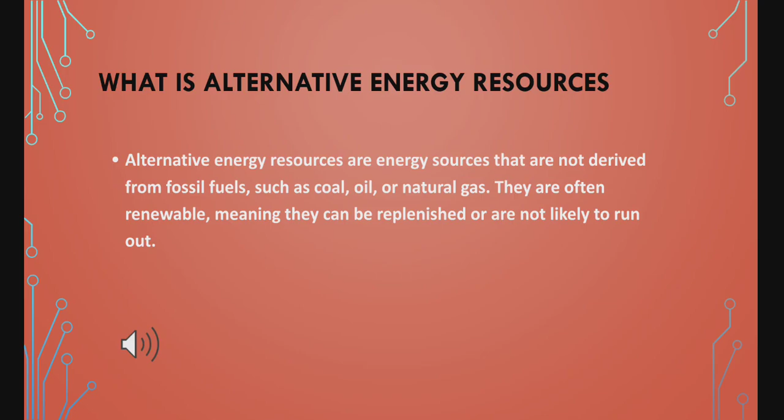What is alternative energy resources? Alternative energy resources are energy sources that are not derived from fossil fuels such as coal, oil, or natural gas. They are often renewable, meaning they can replenish or are not likely to run out.

Energy is the capacity to do work. All forms of life, particularly humans, need energy to perform life processes. Likewise, energy is required to enable machines to function.

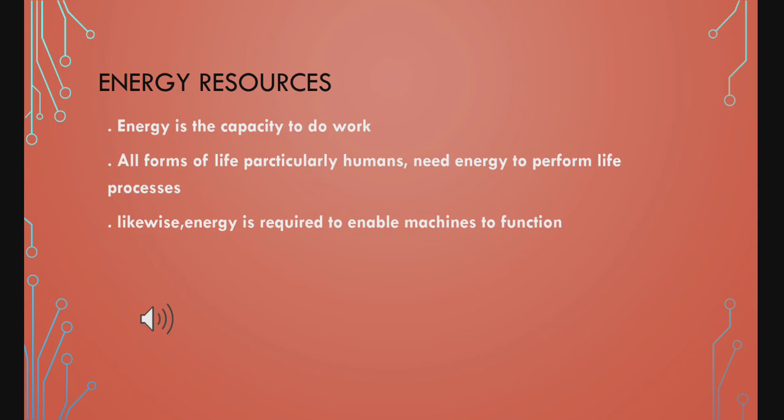An energy resource is something that can produce heat, power life, move objects, or produce electricity. Most of the energy being used today comes from fossil fuel. Fossil fuel is biomass energy buried within the earth where it is stored until humans extract and burn it to release the energy. Among these sources are petroleum, oil and natural gas, oil shale, tar sands, and gas. The energy mix is roughly 39% petroleum, 24% natural gas, 23% coal, 8% nuclear, and 6% others.

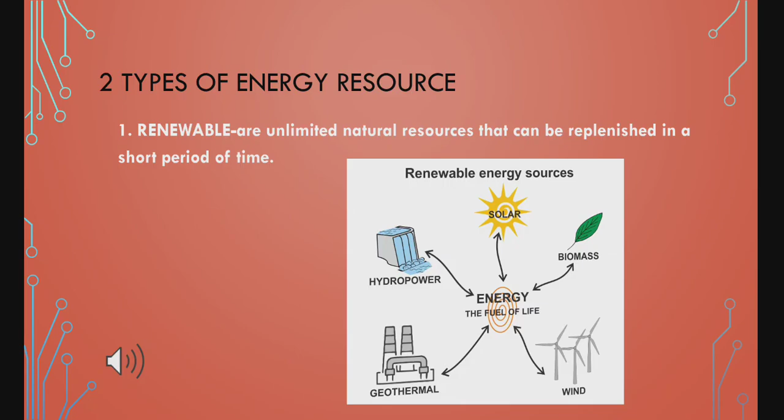Two types of energy resource. Number 1, renewable, are unlimited natural resources that can be replenished in a short period of time. Number 2, non-renewable, are limited natural resources that cannot be remade or regrown in a short amount of time at a scale comparable to its consumption.

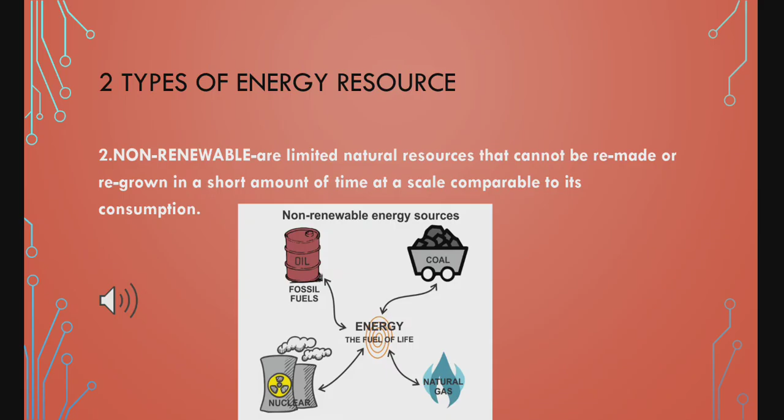The issue is this: since fossil fuels are non-renewable sources of energy, how much longer can society rely on this source? Further, what are the options for the future?

Alternative Energy Resources (AER). Alternative or renewable energy resources are important and necessary to respond to society's energy needs and battle against climate change. Alternative energy refers to clean, natural, and renewable energy sources. These may be solar, wind, geothermal, waves, tide, waste, biomass, hydrogen, and so on.

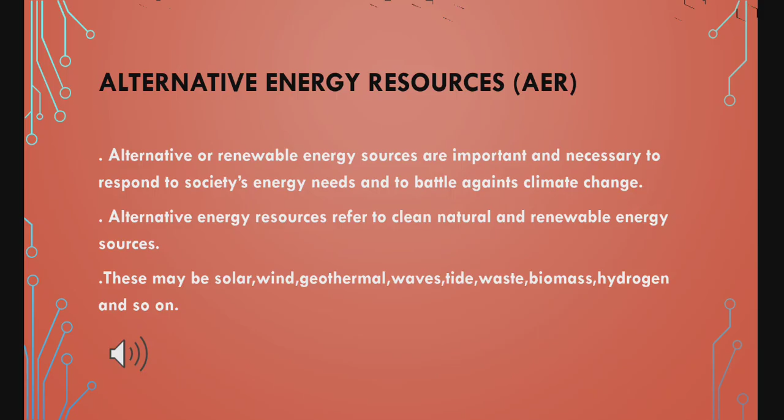Solar energy. Solar energy is derived from the sun's light, forming electromagnetic waves which are converted to electrical or mechanical energy. Solar power is a reliable and safe alternative energy source today because it produces free heat, free electricity without producing and releasing harmful carbon dioxide (CO2) emissions.

The solar farm in Calatagan, Batangas, the largest solar farm in Luzon, generates heat from the sun according to the developer of Solar Philippines. The solar farm consisted of over 200,000 panels on a 160-hectare property and could supply enough power for the entire western Batangas.

The largest solar energy in the Philippines and the world. The Helios Solar Power Plant, the largest solar energy facility in the Philippines, also known as Helios Solar Park, is a significant solar power facility in the Philippines, located in Cadiz City, Negros Occidental. It boasts a capacity of approximately 150 megawatts, making it one of the largest solar power plants in the country.

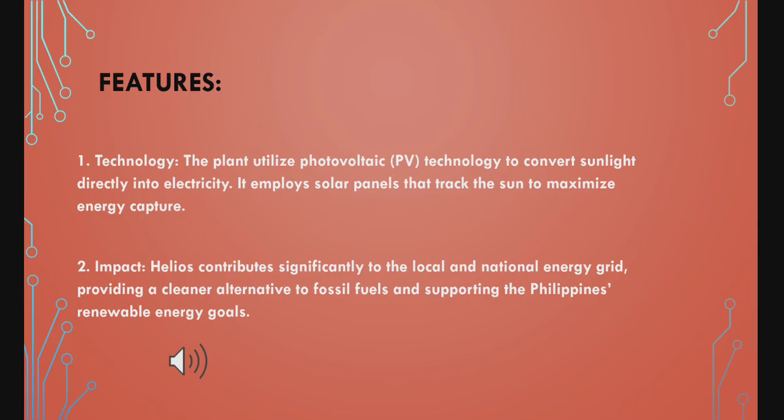Number 2, Impact. Helios contributes significantly to the local and national energy grid, providing a cleaner alternative to fossil fuels and supporting the Philippines' renewable energy goals. Number 3, Sustainability. The project helped reduce greenhouse gas emissions and promote sustainable energy practices, contributing to the fight against climate change. Number 4, Local benefits. The facility not only generates power but also creates local jobs during construction and operation, fostering economic development in the area.

The largest solar energy facility in Philippines and the world. The largest solar energy facility in the world is Bhadla Solar Park, located in the Bhadla region of Rajasthan, India.

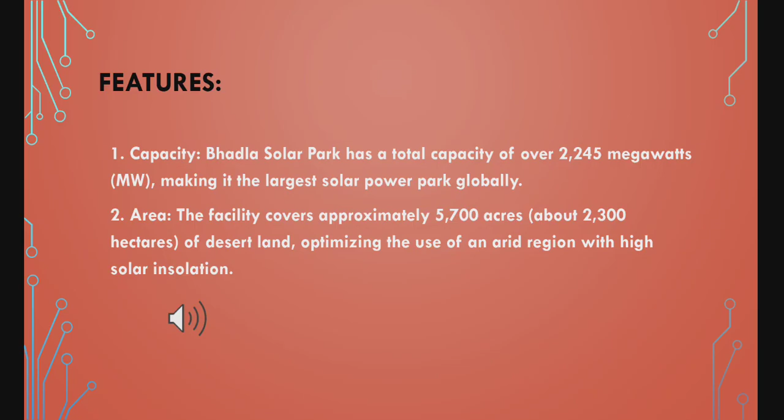Features. Capacity: Bhadla Solar Park has a total capacity of over 2,245 megawatts, making it the largest solar power park globally. Number 2, Area: the facility covers approximately 5,700 acres, about 2,300 hectares of desert land, optimizing the use of an arid region with high solar insolation.

Number 3, Development. The park consists of several solar power plants developed by various companies and is part of India's larger push towards renewable energy, aligning with the country's goals to achieve 100 gigawatts of solar power by 2022.

Number 4, Technology. The facility primarily uses photovoltaic panels that convert sunlight into electricity. The design allows for efficient energy generation with solar trackers that adjust the panel position to follow the sun.

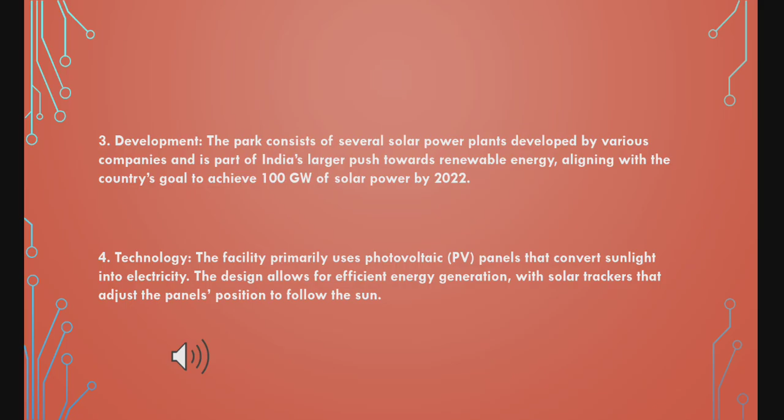Number 5, Environmental impact. Bhadla Solar Park significantly reduced carbon emissions and helped India decrease its reliance on fossil fuel, contributing to global efforts to combat climate change. Number 6, Economic benefits. The project has created numerous jobs and supports local economies while also ensuring a stable energy supply for the region.

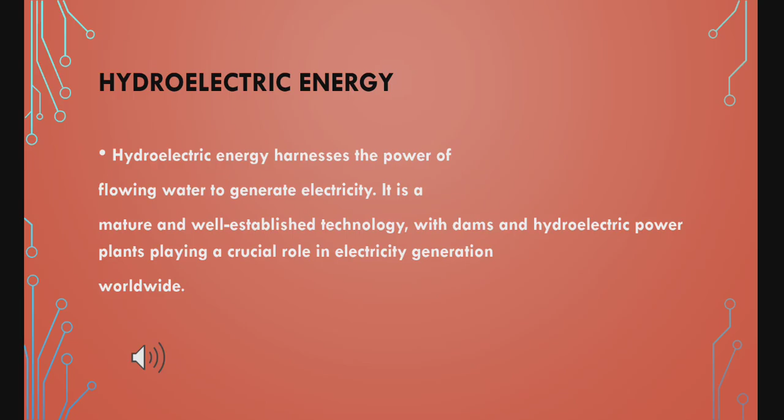Hydroelectric energy. Hydroelectric energy harnesses the power of flowing water to generate electricity. It is a mature and well-established technology, with dams and hydroelectric power plants playing a crucial role in electricity generation worldwide.

How it works. Hydroelectric power is generated by using the moving water to turn a turbine, which then spins a generator to produce electricity. At the plant level, water flows through a pipe also known as a penstock and then spins the blades in a turbine, which in turn spins a generator that ultimately produces electricity.

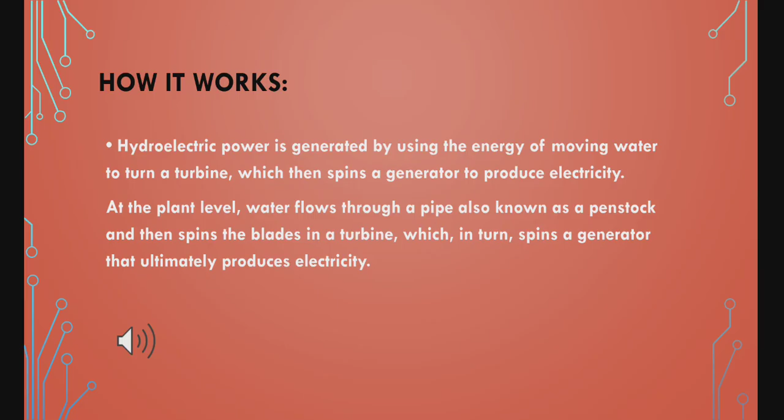Example: Magat Dam, located in Isabela, has a capacity of about 360 megawatts and provides irrigation as well as hydroelectric power. 2. Binga Dam, situated on the Agno River in Benguet, has a capacity of 140 megawatts and is part of a larger hydropower system.

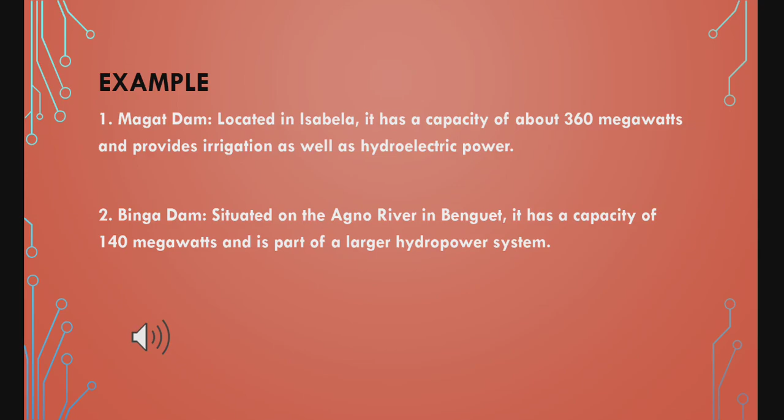3. Ambuklao Dam, also on the Agno River, this facility has a capacity of 75 megawatts and plays a key role in flood control and irrigation. 4. Kalayaan Hydroelectric Power Plant, part of the San Roque Multipurpose Project, generates approximately 400 megawatts.

5. Maria Cristina Hydroelectric Plant, located in Iligan City, has a capacity of 200 megawatts and is known for its role in the Mindanao grid.

Geothermal energy is energy that comes from the heat inside of the earth. Underground heat is produced by the presence of the molten rock called magma.

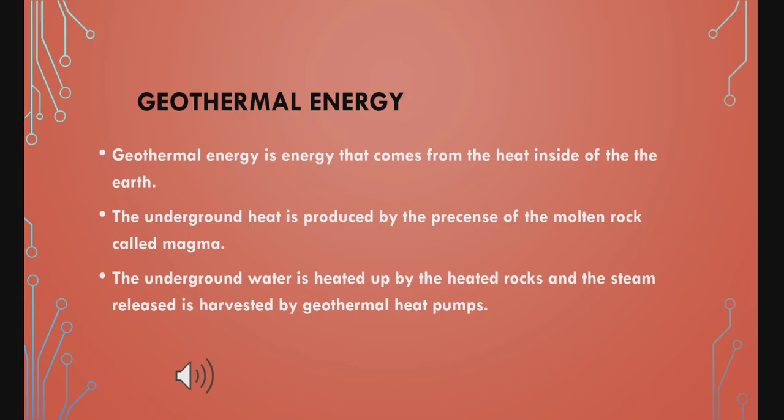The underground water is heated up by the heated rocks and the steam released is harvested by geothermal heat pumps.

Geothermal energy is limited to areas of known thermal activity, mainly recently active volcanic areas.

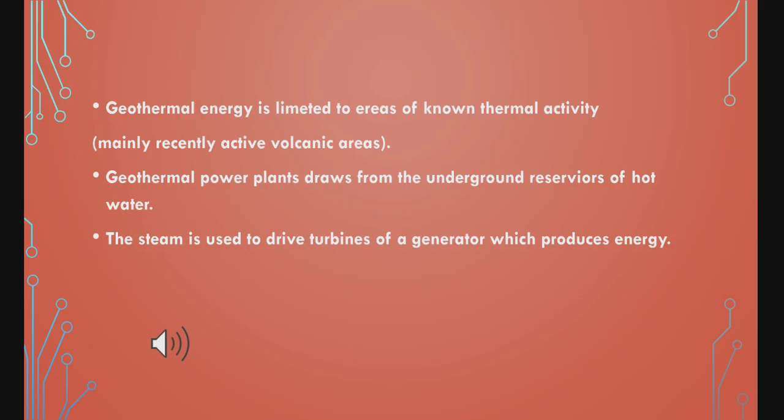Geothermal power plants draw from underground reservoirs of heated water. The steam is used to drive turbines of a generator which produces energy.

Makban Geothermal Power Plant located in Laguna. This plant has a capacity of around 400 MW and supplies electricity to the Luzon Grid.

Tiwi Power Plant generates about 300 MW and is one of the earliest geothermal power plants in the country.

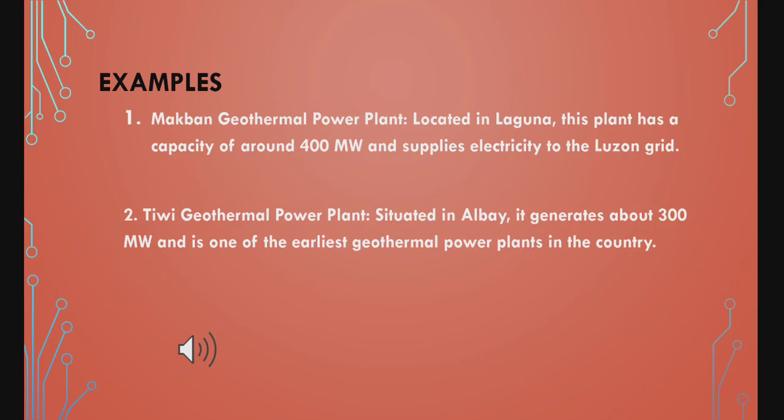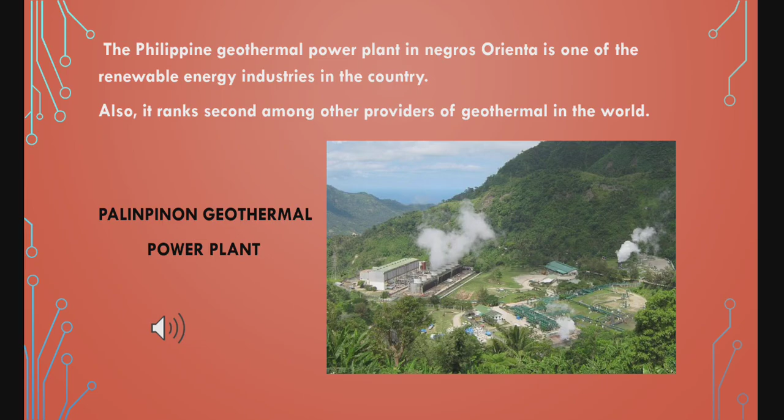Geothermal power plant in Negros Oriental is one of the renewable energy industries in the country. It also ranks second among the providers of geothermal energy in the world.

Wind energy. Wind energy is clean energy derived from wind. It is distributed offshore and onshore by large wind turbines.

Wind turbines use the momentum of moving air to quietly turn large blades that are attached to the shaft of an efficient generator. Wind power is converted to mechanical or electrical energy.

Wind power is limited to areas with high, consistent winds, and so is limited to very specific areas.

How it works: wind turbines. Wind turbines are the primary technology used to harness wind energy. When the wind blows, it turns the blades of the turbine.

Rotation: the rotation of the blades spins a rotor connected to a generator inside the turbine. As the rotor spins, it drives the generator to convert mechanical energy into electrical energy.

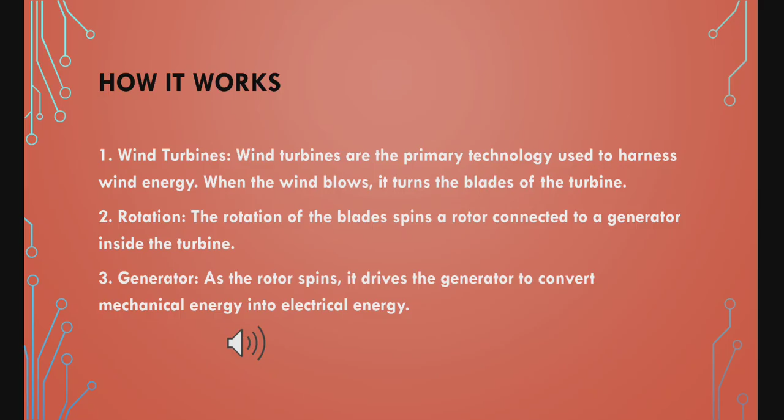Electricity transmission: the generated electricity is then transmitted through power lines to homes and businesses. Grid integration: wind energy can be integrated into the electrical grid, complementing other energy sources.

Example number 1: Burgos Wind Farm, Ilocos Norte. This is the largest wind farm in the country with a capacity of 150 MW. It consists of 50 turbines and contributes significantly to the local grid.

Number 2: Bangui Wind Farm, Ilocos Norte, one of the first wind farms in the Philippines. It features 20 turbines with a total capacity of 33 MW, and is also known for its scenic views.

Number 3: Caparispisan Wind Farm, Pagudpud, Ilocos Norte. This project has a capacity of 54 MW and is part of efforts to harness wind energy in the region.

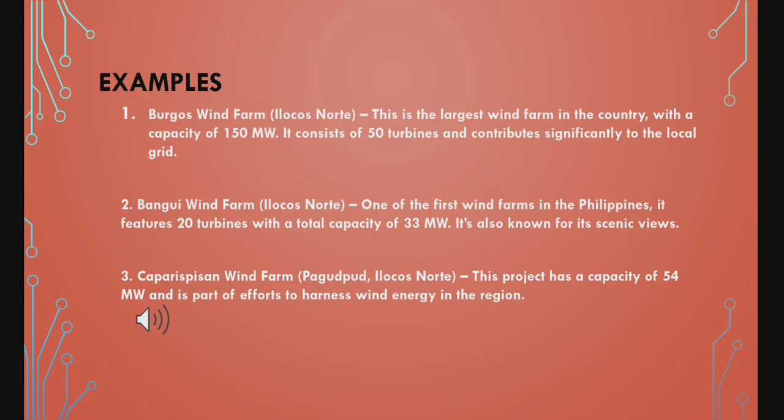Number 4: Nabas Wind Farm, Aklan. This farm has an installed capacity of 63 MW and plays a crucial role in supplying renewable energy to the Visayas region. Number 5: Guimaras Wind Farm, Guimaras.

This is a smaller project but contributes to the local renewable energy mix, enhancing energy security in the area.

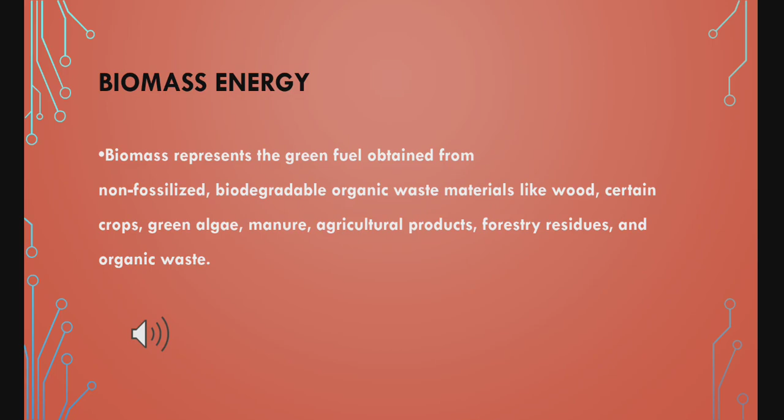Biomass energy. Biomass represents the green fuel obtained from non-fossilized, biodegradable, organic waste material like wood, certain crops, green algae, manure, agricultural products, forestry residues, and organic waste.

These materials are burned to create steam from a centralized water source, which then turns a turbine so that energy can be created. Biomass energy can be converted into a stable form of heat and electricity.

Biomass is considered a cheaper renewable energy source because trees regrow and waste will always exist as long as there is life on Earth.

A power station that uses biomass to generate clean electricity will consume at least 75 tons of biomass every hour to generate above 50 megawatts of energy.

Biomass project in Cadiz City is a power plant with a generation capacity of 18 megawatts, supplying base load power to the local grid. The biomass facility uses agricultural wastes such as sugarcane trash, coconut husk and shell, wood, grasses,

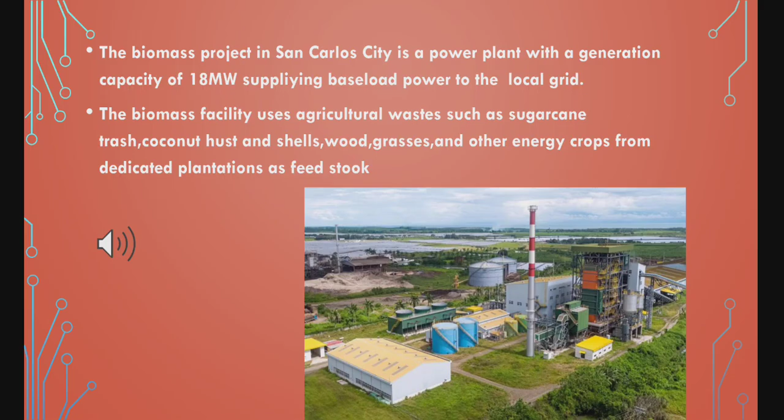and other energy crops from dedicated plantations as feedstock. Rice husk, a byproduct of rice milling, is often used for generating electricity and heat.

Sugarcane bagasse, the fibrous residue left after extracting juice from sugarcane, is commonly used in sugar mills for power generation.

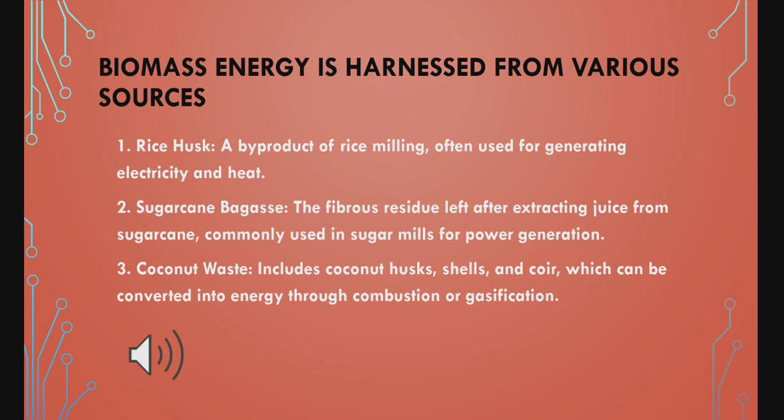Coconut waste includes coconut husk, shell, and coir, which can be converted into energy through combustion or gasification.

Wood and forest residues, sourced from logging activities and tree plantations, are used for biomass power plants. Agricultural residues include material from corn, bananas, and other crops, which can be used for bioenergy production.

Animal manure, waste from livestock, can be anaerobically digested to produce biogas for heating and electricity.

Biogas from landfill: organic waste decomposition in landfills produces methane, which can be captured for energy use.

Ocean energy. Ocean energy is derived from tidal current or wave energy, which is converted into mechanical energy or electrical energy. About 71.11% of the Earth is covered by water bodies, especially oceans.

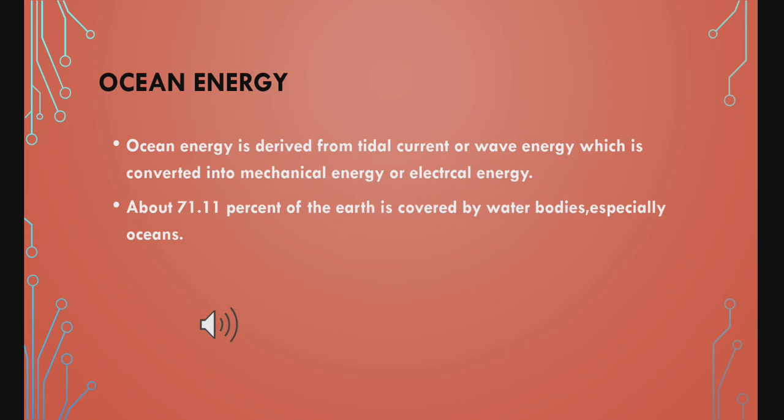How it works: tidal energy. This uses the rise and fall of the tides caused by the gravitational pull of the moon and sun. Tidal turbines or barrages capture this kinetic energy.

Number 2: wave energy. Waves created by wind energy on the surface of the ocean can be captured using various devices such as point absorbers and oscillating water columns, to convert the motion into electricity.

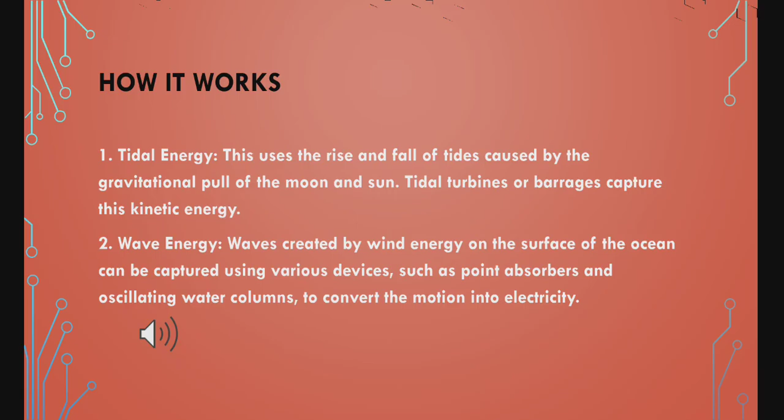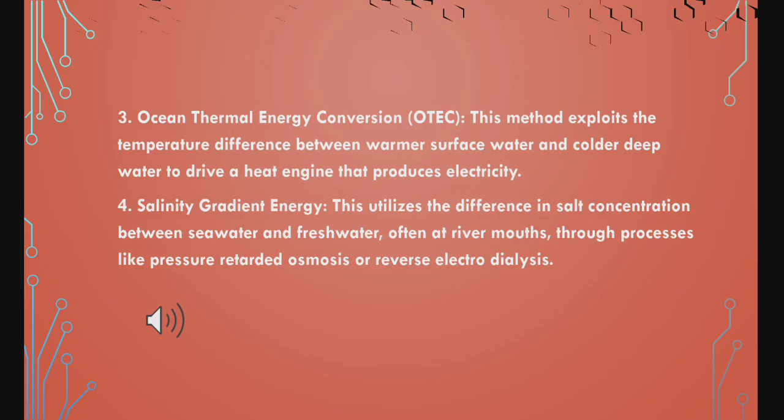Advantage and disadvantage of renewable energy. Many countries, businesses, corporations, and individuals today are adopting renewable resources of energy for a number of great benefits such as the following.

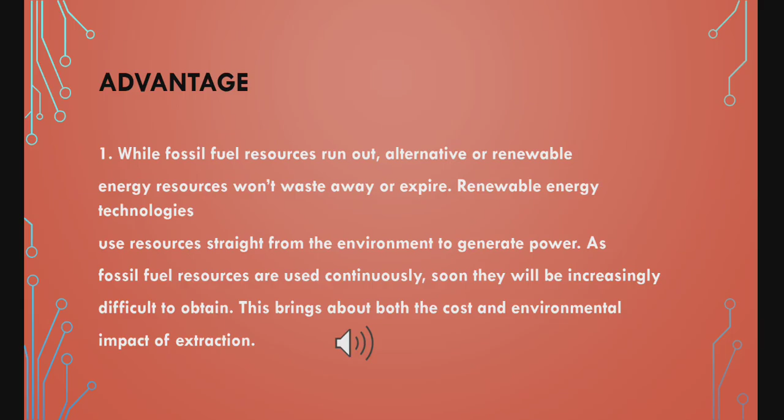Advantage number 1. While fossil fuel resources run out, alternative or renewable energy resources don't waste away or expire. Renewable energy technologies use resources straight from the environment to generate power. As fossil fuel resources are used continuously, soon they will be increasingly difficult to obtain. This brings about both cost and environmental impact of extraction.

Advantage number 2. In most cases, unlike fossil fuel resources, renewable energy technologies require less overall maintenance. This is because generating technology like solar panels and wind turbines either has few or no moving parts and don't rely on flammable, combustible fuel resources to operate. Fewer maintenance requirements translate to more time and money saved.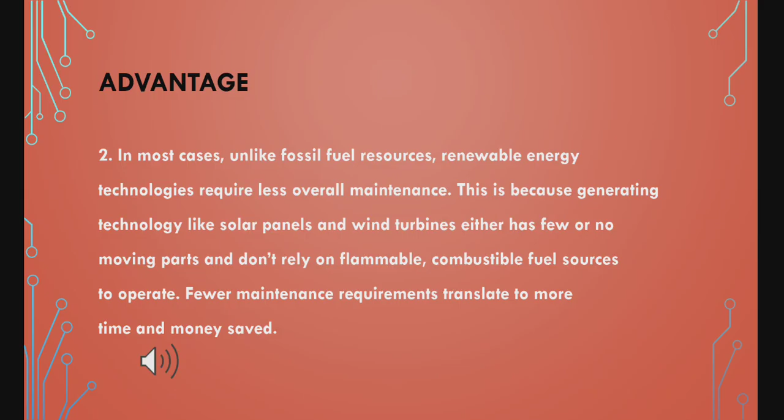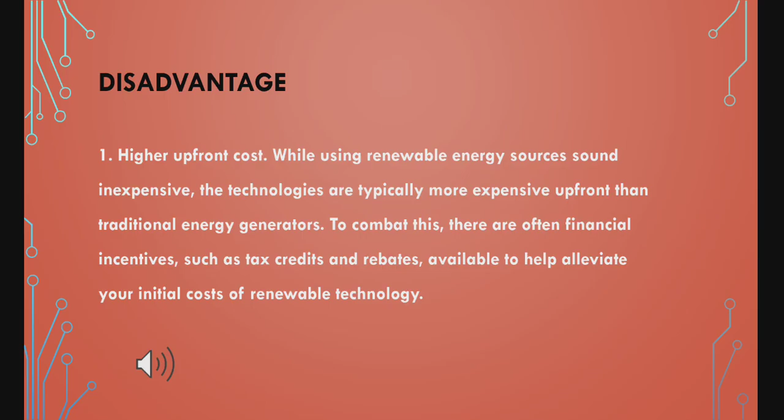Disadvantage number 1, higher upfront cost. While using renewable energy sources sound inexpensive, the technologies are typically more expensive upfront than traditional energy generators. To combat this, there are often financial incentives such as tax credits and rebates available to help alleviate the initial cost of renewable technology.

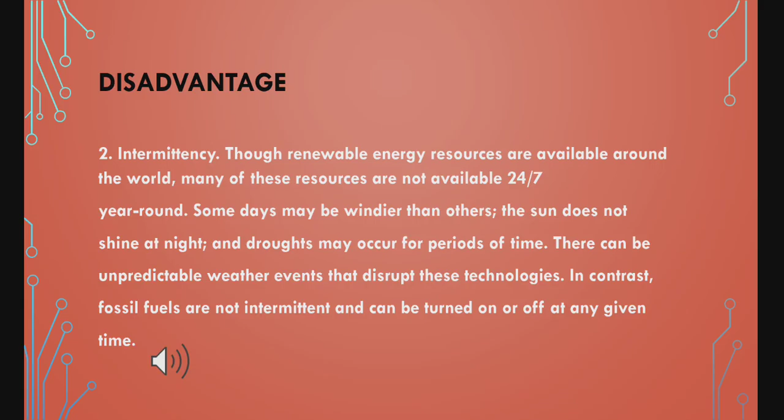Disadvantage number 2, intermittency. Though renewable energy resources are available around the world, many of these resources are not available 24/7 year-round. Some days may be windier than others, the sun does not shine at night, and drought may occur for periods of time. There can be unpredictable weather events that disrupt these technologies. In contrast, fossil fuels are not intermittent and can be turned on or off at any given time.

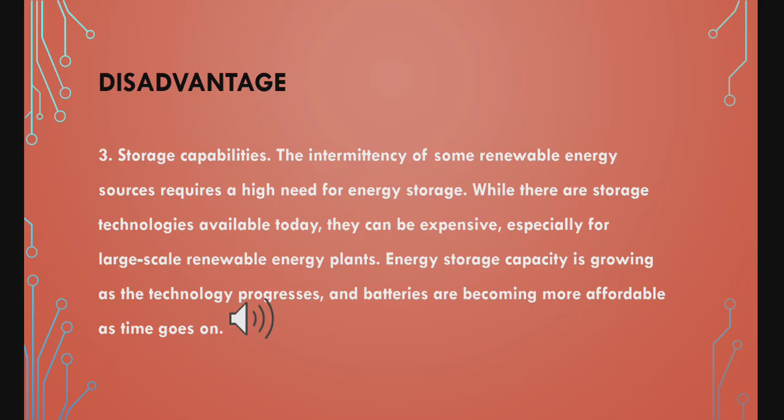Disadvantage number 3, storage capability. The intermittency of some renewable energy resources requires a high need for energy storage. While there are storage technologies available today, they can be expensive, especially for large-scale renewable energy plants. Energy storage capacity is growing as the technologies progress, and batteries are becoming more affordable as time goes on.

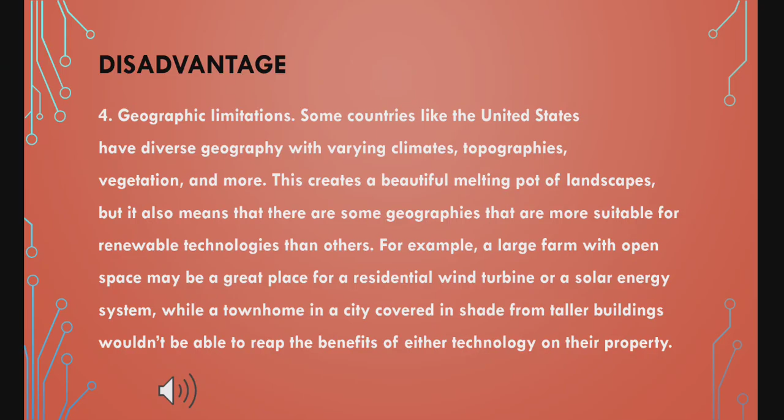Disadvantage number 4, geographic limitations. Some countries like the United States have diverse geography with varying climates, topographies, vegetation, and more. This creates a beautiful melting pot of landscapes, but it also means that some geographies are more suitable for renewable technologies than others. For example, a large farm with open space may be a great place for a residential wind turbine or solar energy system, while a townhome in a city covered in shade from taller buildings would not be able to reap the benefits of either technology on their property.

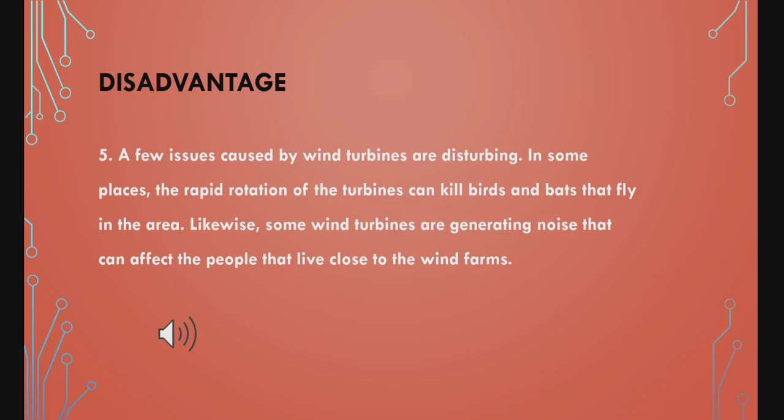Disadvantage number 5. A few issues caused by wind turbines are disturbing. In some places, the rapid rotation of the turbines can kill birds and bats that fly in the area. Likewise, some wind turbines generate noise that can affect the people that live close to the wind farm.

Overall, the use of alternative sources of energy will provide energy security as well as economic and local development. There are challenges and barriers in the utilization of said sources of energy, such as high upfront and technology costs, non-competitiveness, non-viable markets, inaccessible financial packages, and its social acceptability.

The Philippine government has enacted two landmark laws to address such barriers. 1. Republic Act Number 9367, also known as the Biofuels Act of 2006, which provides fiscal incentives and mandates the use of biofuel-blended gasoline and diesel fuels. 2. Republic Act Number 9513, also known as the Renewable Energy Act of 2008, which is a way of accelerating the development of the country's renewable energy sources by providing fiscal and non-fiscal incentives to private sector investors and equipment manufacturers and suppliers.